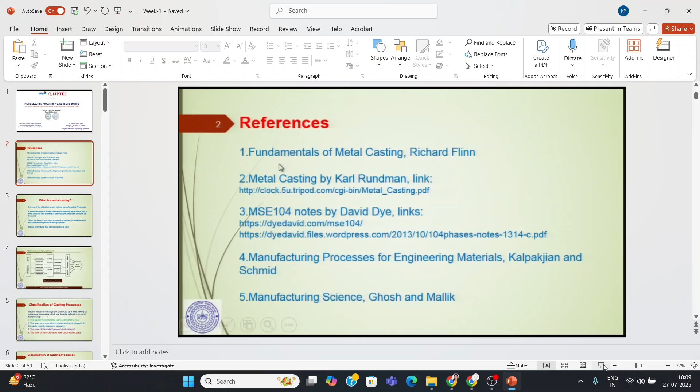Okay, someone is joining. Then I will solve some numericals. This will be very helpful for your basic understanding, and if you are attending the GATE exam or like this competitive exam, it will be helpful for you also.

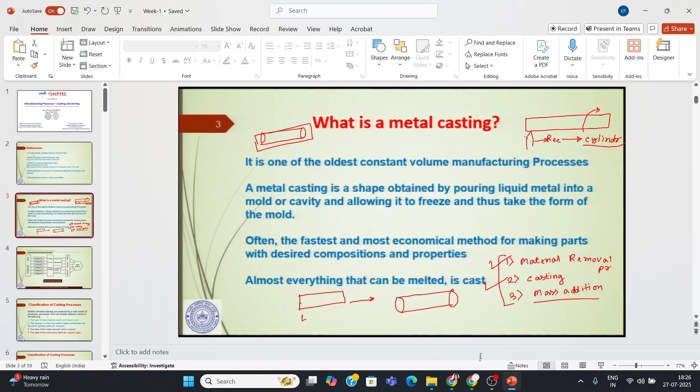Okay, this is also possible actually. How is this possible? But this is not very worthy actually. How is it possible? You can add some material through the corner side and try to give it a rectangular kind of shape by adding some material over the surface. But it is not so good a process, or it is not so convenient actually. But you can make it.

So there are three major principles on which the overall manufacturing process stands. First is material removal processes, second is casting, and third is mass addition processes. Here we will study the casting processes only.

You know the definitions of casting already, you have studied. A metal casting is a shape obtained by pouring liquid molten metal into a mold or cavity, and allowing it to freeze, thus taking the form of the mold. I think you have studied it. It is very simple.

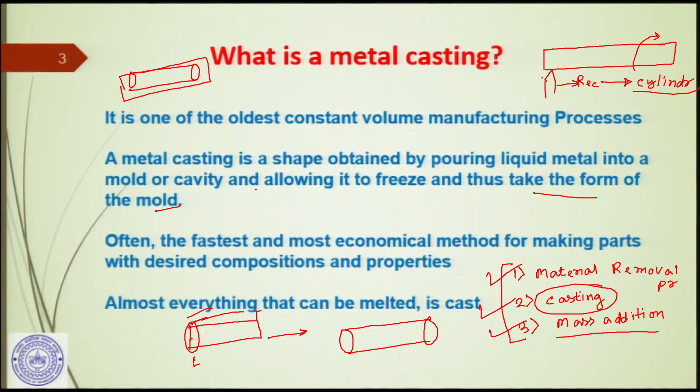This is also the basic thing: how a component, any component of an automobile or anything, how the final product can be prepared. First you have to take the raw material, then you have to go through the different processes.

You can prepare a component by casting directly, or you can go through primary forming, like different machining - lathe operations, cutting, grinding, different things. This is the secondary operation, also including machining, grinding, all the things. And finally you have to give some finish - surface finish, or maybe some joining process is there.

Suppose you are going to make a T section - you have to make two different parts, then join them together to make the final product, this T shape. This is the joining process, assembly process, or finishing process. After preparing the material, you have to give the surface finish, such that the material can be usable or user friendly, or you can easily use it. This is how you get the final product.

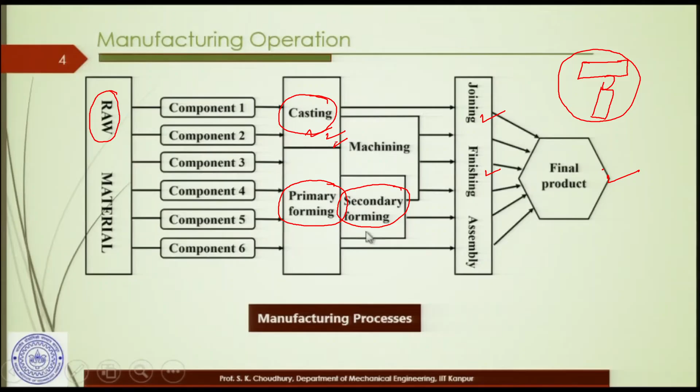But here we will only concentrate on the casting processes. These are very basic things you have already studied - the type of mold you can use, sand mold or permanent mold. These basic things I will not describe here.

Classifications of the casting processes: expandable casting includes expendable mold and permanent mold. Expendable mold means it is a single-time usable mold, like sand casting. You are giving a shape.

Suppose you have to prepare one cylindrical rod. Outside the cylindrical rod there will be sand, and inside you have to prepare a mold cavity like a cylindrical cavity. When you pour the molten metal, it will take the cylindrical shape, and finally you will get the rod-type cylindrical shape material. So this is sand - here sand is used for the casting. After getting the final material, you can break this sand, and you will prepare the next type - any material you can prepare.

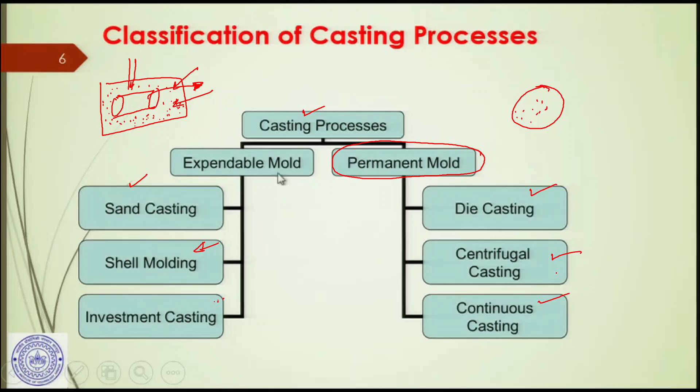Permanent molding includes die casting, centrifugal casting, and continuous casting. This is the permanent mold - here sand is not used. This is some data you can go through; I am not going through the details.

What is the main advantage of casting? The main advantage of casting is there is no loss of material. Suppose you are making one product by casting, you will pour the liquid molten metal into the mold cavity and give it one particular shape. Any extra material or extra part, you will just machine it off, and then again you can melt it for reuse, and again prepare another casting. There is no loss of material.

That's why it is called a constant mass operation process. But for the case of machining, the material will be lost in the form of chip. This is the main advantage.

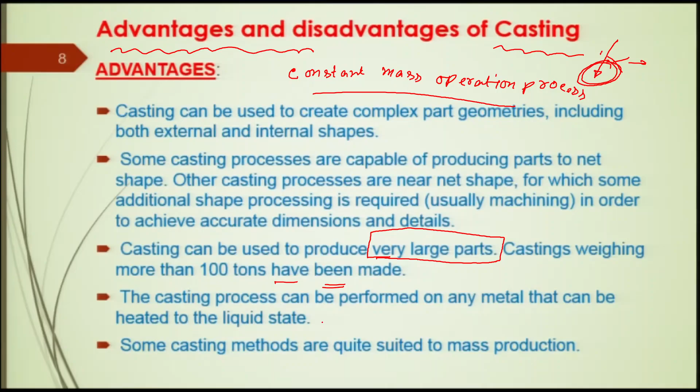What is the disadvantage of these casting processes? The mechanical properties, like porosity, strength may be damaged, or mechanical property may decrease due to porosity. Actually, how does the porosity come? Do you know, any one of you? How does porosity come into the final product? How does porosity occur during the casting process?

You don't know. This is a very simple thing. You should answer.

Due to shrinkage? No, no, no, due to shrinkage, no.

Yes, trapped gas, exactly, Sri Sri. Sri Sri has answered, but he is messaging. You can unmute and you can say, okay, yes.

Due to the trapped gas. How will the gas form? Any one of you can say? In the mold cavity, suppose this is the sand, I am preparing one cylindrical rod. How will the gas come?

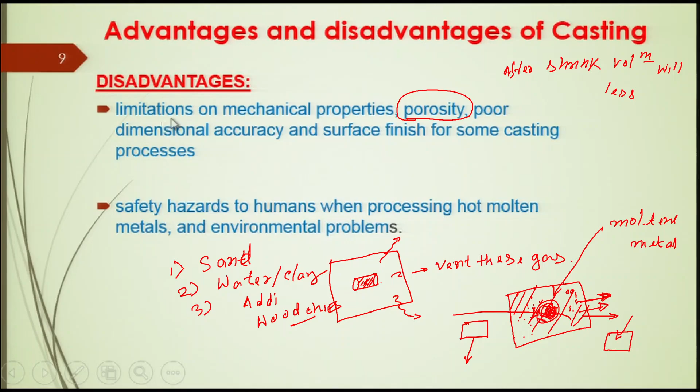Can you give one example of mass addition processes? Mass addition process, third manufacturing process, whatever I have discussed. What is an example of mass addition manufacturing processes? Casting? No.

Casting is a constant mass operation process. That means the mass of the final product and the initial product is the same in the casting process. But I am telling you something you are going to manufacture where the final mass will be higher than the initial mass.

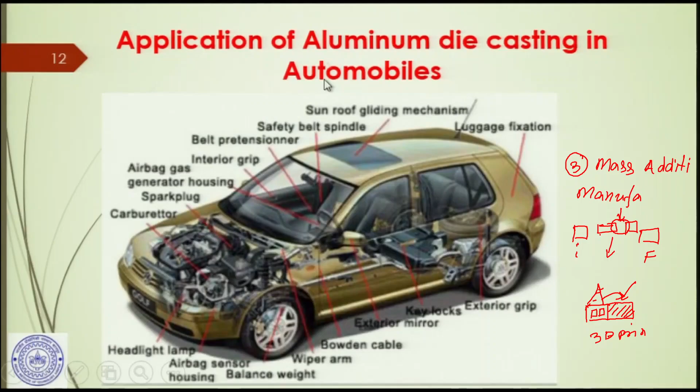So mass addition processes are basically welding and rapid prototyping processes. Continuous and constant mass operation process is the casting process, and material removal process is lathe machining, different machining processes, and surface finishing processes. On the basis of these three basic principles, manufacturing processes are classified. You should understand this - I think you have studied all this in the video, so I will not go over it again.

Pattern - what is a pattern? Is it required in the casting process? Yes, sir, yes.

How is it required? First of all, if you are going to manufacture any piece of material, you have to make one replica of your final product. Replica means you have to prepare the same thing using a different material like wood, or not costly material - easily available material.

Then you have to make the mold cavity inside using sand, green sand molding. Then you will get the desired shape inside the mold cavity, pour the liquid molten metal, and get the final product after solidification. So the pattern is the preliminary part you have to prepare.

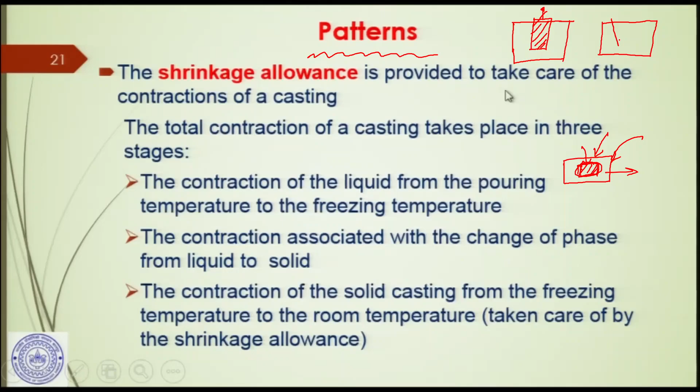And another pattern - I am making another pattern here. Suppose here is the another pattern. Which one will be easily removed without any damage to the mold cavity? This is the first one, and this is the second one.

Without damaging the surface of the mold cavity, which pattern will be suitable? First or second - which option is right? Second. Why?

Taper is provided as draft. Draft means some angle is given, such that the mold cavity will be less damaged. After that, as I have added extra material, like here, just a trapezoidal shape, this extra material will be removed by machining processes. This extra material is called the draft allowance. Is it clear?

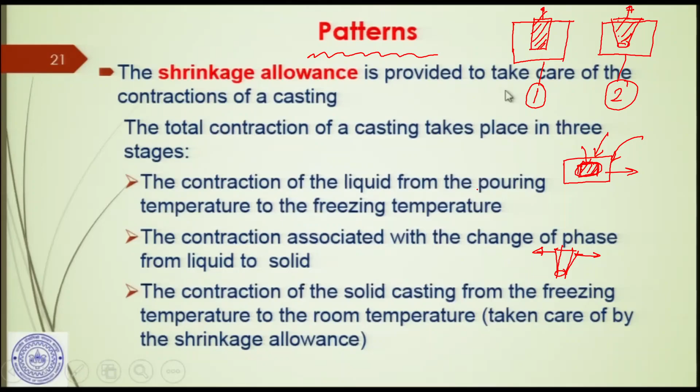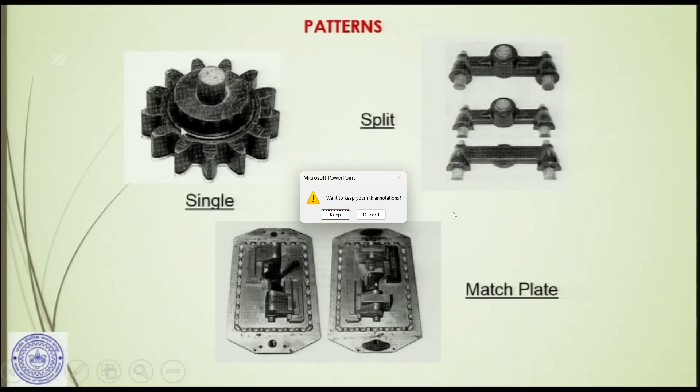Okay, this is the single piece pattern, split pattern, match plate pattern. You will study it yourself because it is very theoretical part. I will solve one numerical. This numerical will help you understand all the things. If you solve this numerical in your GATE examinations or any other examinations, your basic concept will be very clear.

The students are yet coming. It's 7. Okay, please try to join on time.

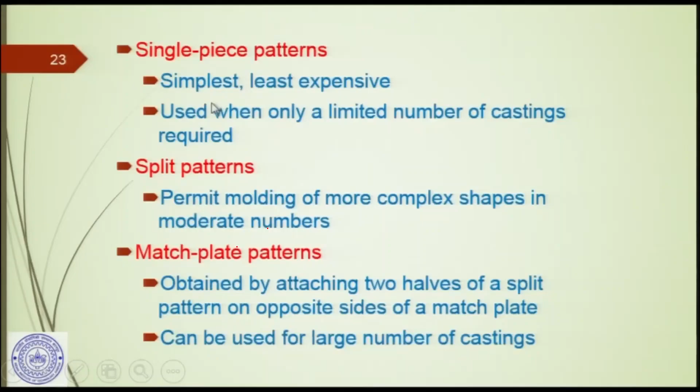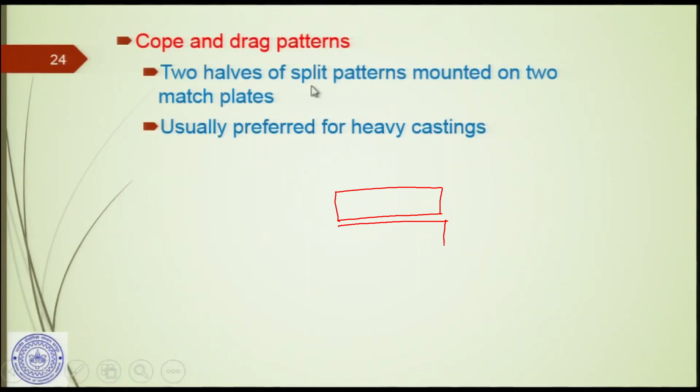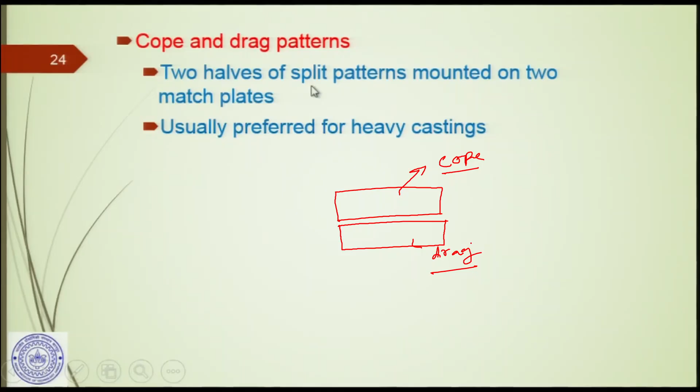This is the theoretical part, I am not going into details. What is the cope and drag? These are the upper and lower parts of the mold. What is the top part called, cope or drag? Upper part is the cope. Just remember these questions because in many examinations like SSC, JE, you can find this type of questions.

This is the shrinkage allowance. Why is the shrinkage allowance given? Because you have to make a slightly larger size cavity or larger size pattern. When the liquid molten metal fills the larger size cavity, after solidification you will observe that the volume is reduced, because of the shrinkage. After solidification the volume will be less, that's why you have to prepare slightly larger size, you have to make the pattern in a larger size. This is actually because of the coefficient of expansion of the material. Due to this shrinkage allowance you can calculate.

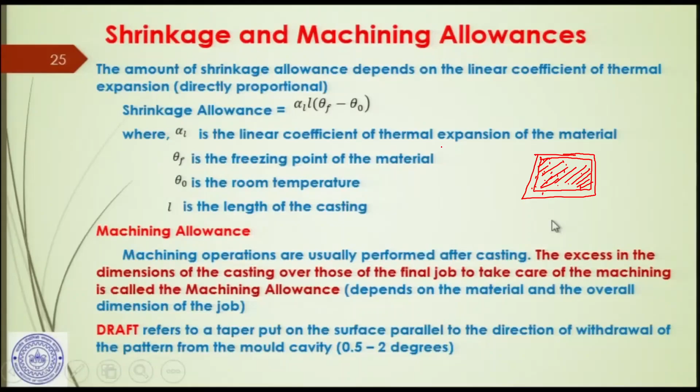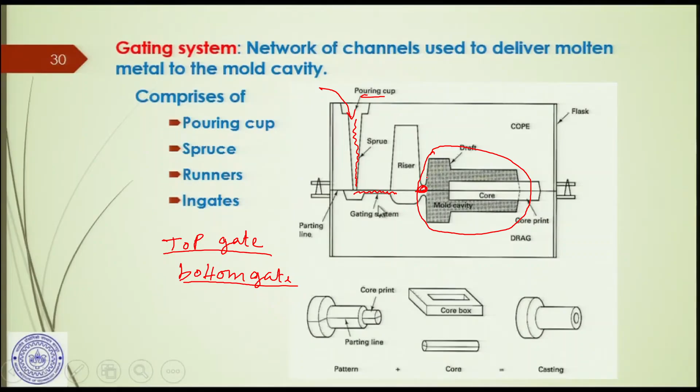You should say this is a combination of top gate and bottom gate. This is the gate, this is the gate, and this is the upper portion. When this upper portion is filled, that's called the top gate, and at first this bottom portion gets filled, that's called the bottom gate. So it is a combination of the top gate and bottom gate. Okay, we will study.

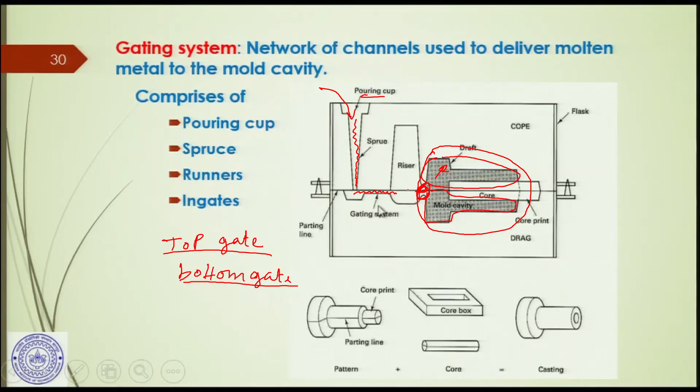Green sand molding: how are the combinations, preparations and compositions made? Sand is an important question - 70 to 85% sand is used, clay is 10 to 20%, and water is 3 to 6%. 3% is very optimum. Also additives like wood flour, dextrine, and sea coal. This is the combination.

One question came in the GATE, I forgot the year. What is the water percentage in green sand molding? You have to remember that it's 3 to 6% water content in green sand molding, and clay is 10 to 20%. Otherwise the sand will not bind properly.

Sir, if you increase the water percentage in the green sand molding, the mold will be weak because of the extra moisture. Exactly, the mold will be weak. Any other problem?

Just see the diagram: X-Y, tensile strength versus weight percentage moisture. Then only you can answer. If we increase the water after 3 percent, the mechanical strength reduces. It is very clear. And what is the other thing?

Permeability decreases. How? The extra water will occupy the porosity - yes, extra amount of water will fill in between the two sand grains. So then the permeability will be less.

And what about density? Density will increase - it's the same thing. The extra porous portions will be filled by the water and the density will be increased.

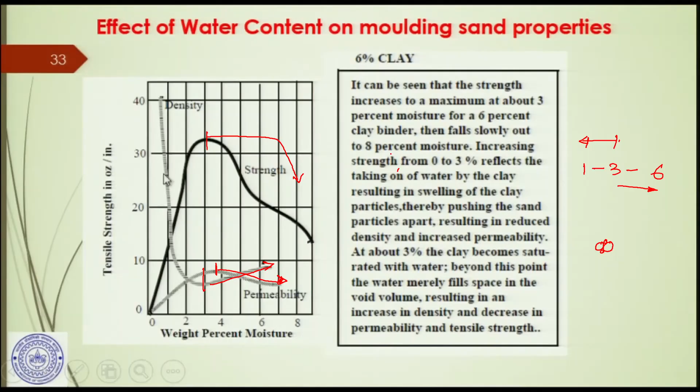And below 3 percent, from 0 to 1, 0 to 3, the density will decrease and the strength will increase gradually, and the permeability will also increase. These things you have to remember - how the percentage of water in green sand molding affects mechanical strength, permeability and density.

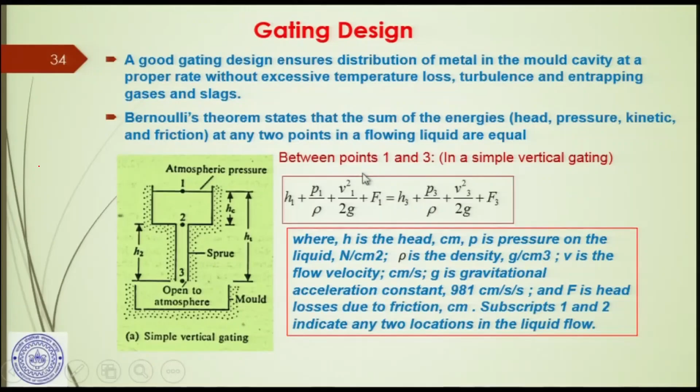Gating design is important. This is the bottom gating. There are two gating systems - bottom gating and top gating. This is the bottom gating, I am explaining here.

This is the molten material, and the molten material is coming through the sprue to the mold cavity. This is the mold cavity. Why is it open to atmosphere? As it is inside the mold cavity, why is this written as open to atmosphere?

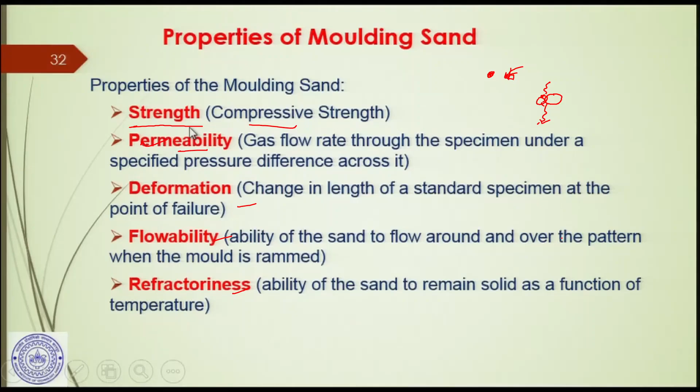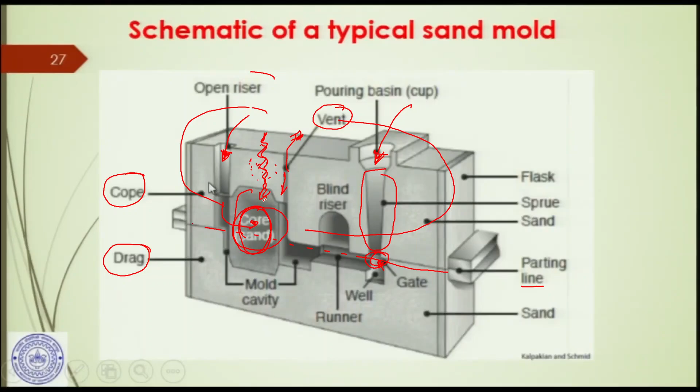Because the vent is provided and the porosity is provided inside the sand, there will be atmospheric pressure. The vent is provided and inside, in between the two sand particles, there will be a gap. The pressure will feel like atmospheric conditions.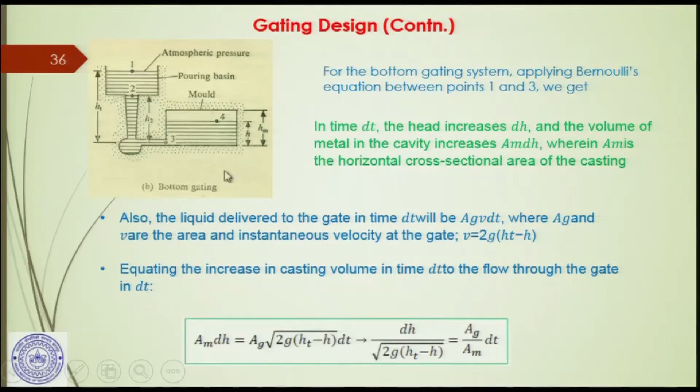I am going to explain the top gating system and bottom gating system. This is important, I am taking some new slide.

This gate design is important. Suppose this is your pouring basin, and the pouring basin is extended by the sprue. This is the sprue, and the molten material is fed here.

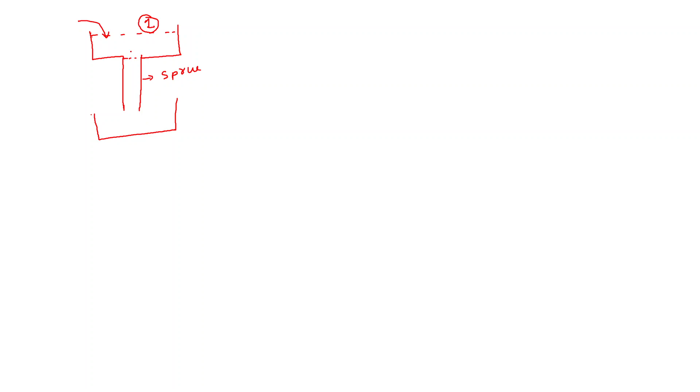The top surface is called 1, and here the sprue section is 2, and the opening at the gating system is 3, and this is the mold cavity. Here this is the mold cavity, this is the mold cavity, this is the mold cavity.

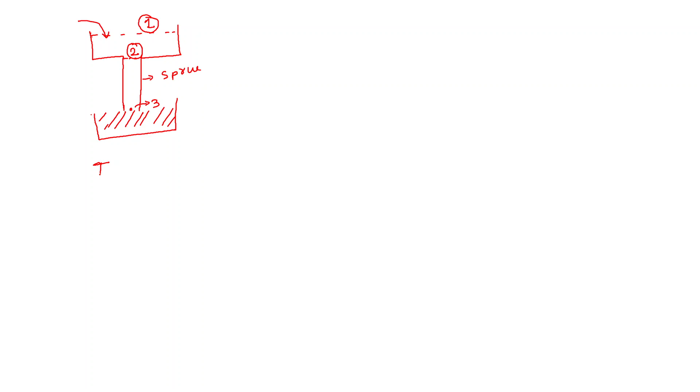Is it top gating or bottom gating? This is top gating. This is the top gating system because the molten material is fed on the top side of the mold, top side on the mold cavity. Is it clear?

Yes sir, okay. What is the important thing? What is the time to fill the mold cavity? This question is important, you have to calculate it. Why will we calculate the time for filling this cavity? Anyone of you can say why we are calculating the time?

I think you have studied the lecture of Professor Sounak Kumar Choudhury, and any lecture you have studied in BTech mechanical engineering. We are going to calculate the time of filling. This is very crucial, very important during the gate design. What is the reason we are interested in time? Anyone of you can say?

So, due to the process of solidification, sir? Yes, because time is very important. If it will solidify before - suppose we are pouring the molten material and it immediately solidifies, and it is not reaching the mold cavity. Before reaching the mold cavity it gets solidified, or sometimes the molten material does not fill the whole mold cavity. That's why time is very important - we have to calculate the time to fill up the whole mold cavity.

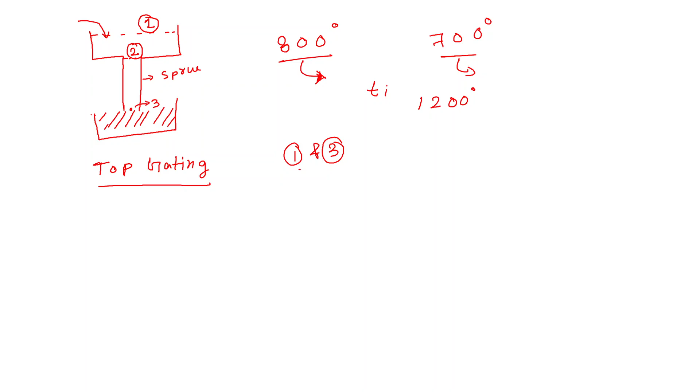If I apply Bernoulli's equation at points 1 and 3, what is Bernoulli's equation for points 1 and 3? This will be P1 (pressure 1) divided by rho g, plus V1 square divided by 2g, plus - I have to give the head. This is the head, this is the total head, HT is the total head. And H2 is this head, and this head is HC. I am applying Bernoulli's equation at points 1 and 3.

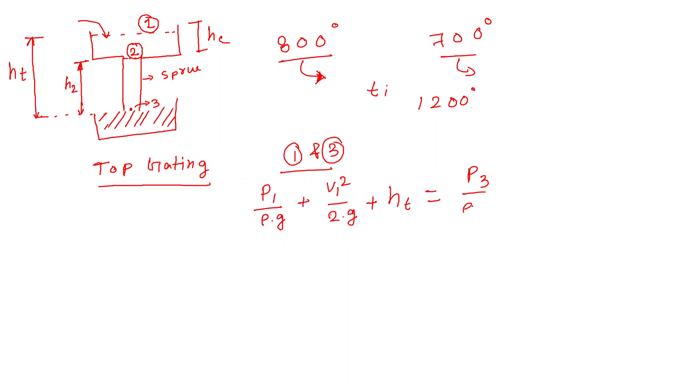At point 1, the total head will be HT, equals to, for point 3, pressure at 3 divided by rho g plus V3 square - you have studied these equations now - plus it will be 0. Why am I writing 0 here? Because I have taken the baseline datum line from here. H3 is the 0 head, that's why it is 0. Is it clear?

This P1 by rho g and P3 by rho g is the same. This is atmospheric pressure, atmospheric condition. Why is this atmospheric condition? One is during the pouring of molten metal, it is atmospheric conditions. But inside the mold cavity, at the gate portion, this is also atmospheric condition. So P1 and P3 are the same, atmospheric conditions, so we can cancel them out.

Now the V1 velocity - what is the value of V1? Velocity of the molten material at section 1. Is it zero, sir? Yes, 0, because we have just started pouring the molten material, so molten material velocity is zero. After that, due to gravity, the molten material starts taking velocity.

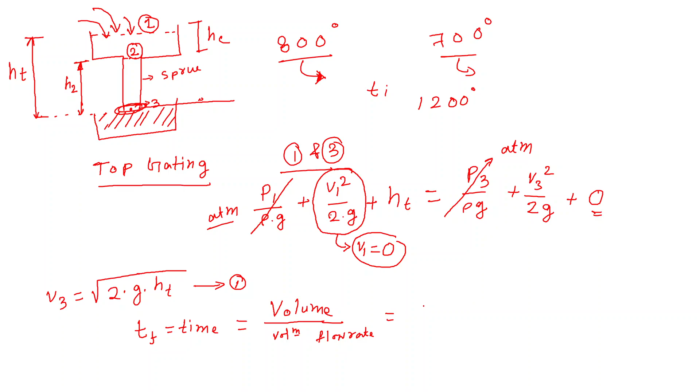So our main objective is to find out the time. This is equation 1. How will I find out the time? Time is the total time to fill the mold cavity - this is total volume of the mold cavity divided by volume flow rate of the liquid. So total time is V, the volume of the mold cavity, divided by AG into V3.

V3 is the velocity, and capital V is the volume of the mold cavity. AG is the gate area - if it is cylindrical, then the area will be pi by 4 d square, gate area at section 3. And V3, the velocity of the molten material, we already know from equation 1, is under root 2G HT.

Is it clear? Material flow at section 3. So we can easily calculate the time if you know the volume of the mold cavity, capital V, and if you know the gate area pi by 4 d square, and the velocity calculated from Bernoulli's equation using sections 1 and 3. You can easily calculate the total time to fill the mold cavity for the case of the top gating system.

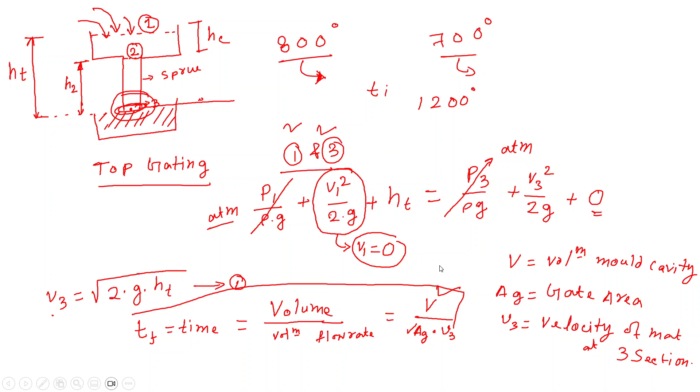Is it okay? Yes sir. Okay, next is the bottom gating. Bottom gating is a bit different, you have to understand. Let me try - how the bottom gating is, this is bottom gating. It is not actually a proper diagram, but this is the bottom gating, I will make you understand.

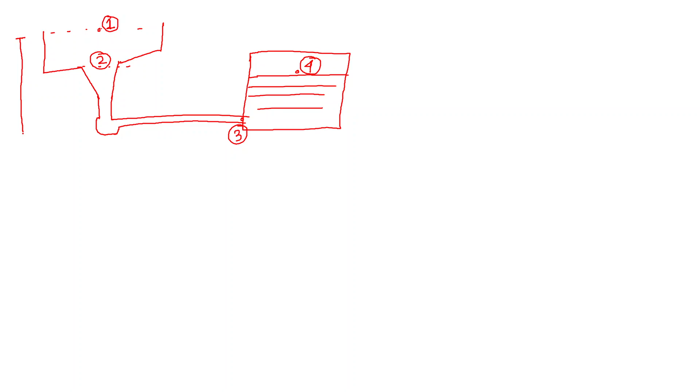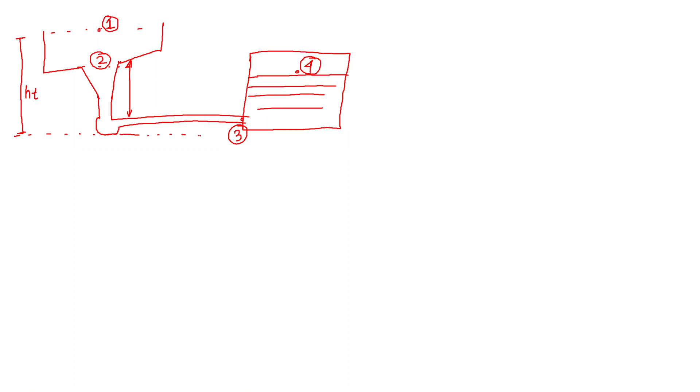The top surface is called position one, and this is position two, and the gate system is position three. Your molten material is filling up to this point - suppose this upper portion is 4, section 4. The total height from 1 to 3 is HT. And H2 is the height from 3 to 2. This is the datum line 3.

At any instant, the height of the molten material filling the mold cavity is H, and the total cavity height is HM, the mold height. At any instant this is H - H is the variable and HM is the constant.

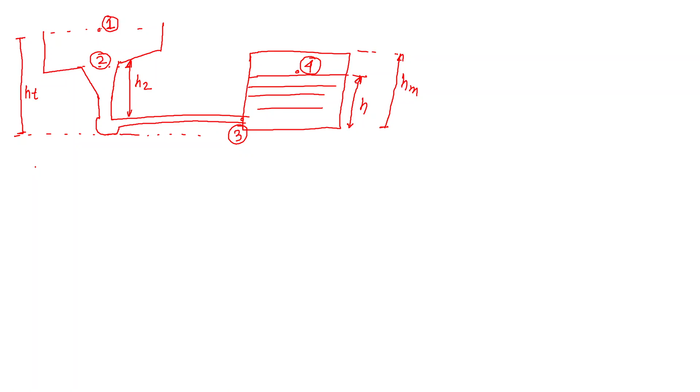For that case, you have to apply Bernoulli's equation at points 1 and 3. What will happen for points 1 and 3? This is P1 divided by rho g plus velocity, which will be 0, plus the height HT. If you don't understand, just ping me. At the three portion, P3 divided by rho g plus V3 squared divided by 2G plus 0. Now you can calculate the value of P3.

Next, apply Bernoulli's equations at the points 3 and 4. This is p3 divided by rho into g, plus v3 square divided by 2g, plus height, equals to position 4: p4 divided by rho into g, plus v4 square divided by 2g, plus h.

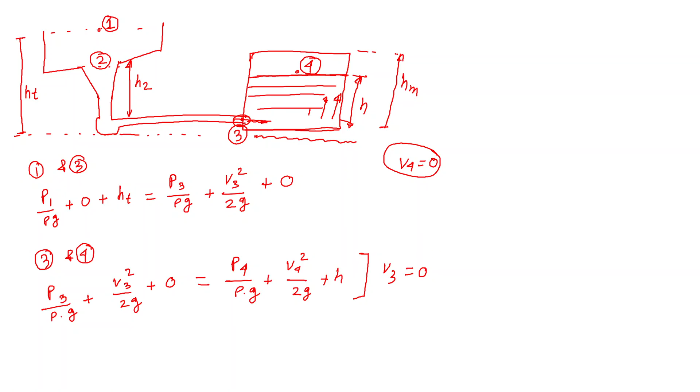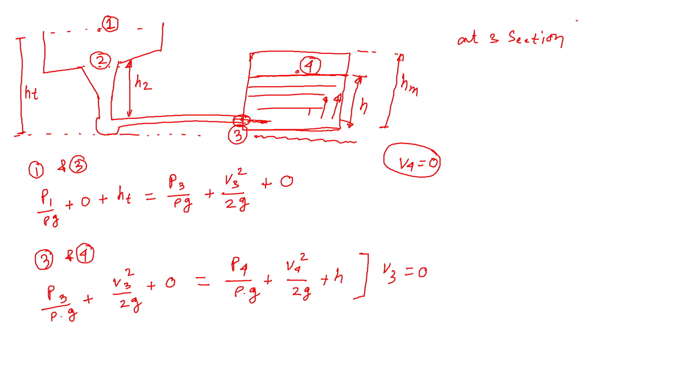That's why V4 is taken as 0, and V3 is also taken as 0, because just at the opening position, the kinetic energy loss is complete. At three sections, kinetic energy loss completely. V3 and V4 values are taken as 0.

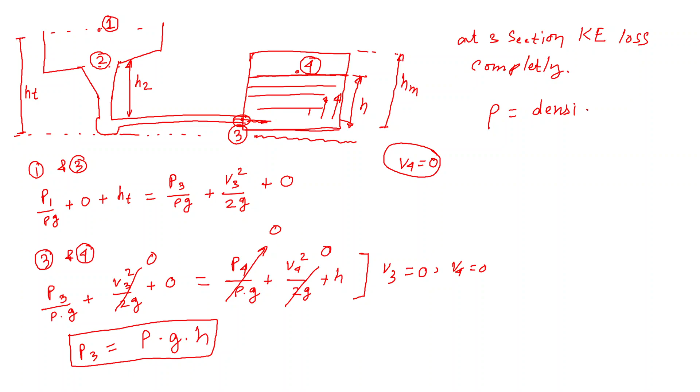So this is also 0, and this is also 0, and P4 is the atmospheric pressure. As P4 is atmospheric pressure, under atmospheric conditions, we take it as 0. So P3 will be rho into G into H. What is rho? Rho is the density of the molten metal.

So you have one equation - this one - and you have this other equation, two equations. If you put this equation two into equation one, you will get the result. You will calculate it at home, otherwise you cannot understand. I will send this slide via a link, and you will get the updated link. If you put equation 2 into equation 1, you will get the result.

You will get v3 value equals under root of 2g into ht minus h. This is important.

Next, our main motto is calculating the time. How will we calculate the time? AM is the cross sectional area of the mold.

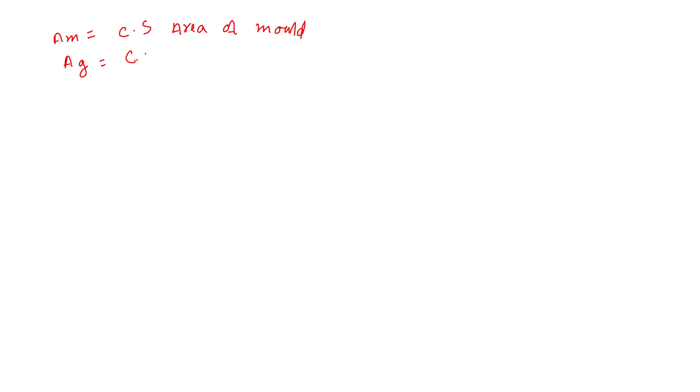And AG, you know, is the gate area, the cross section area of the gate. So if we apply the continuity equations to the gate and the cross section area of the mold, this will come out that AM into DH - DH is the height at any time. In the previous slide, DH is at a small instantaneous time, suppose this very small instantaneous time DH at a time t.

I am calculating for a small portion, the DH portion. Cross section area multiply by DH - this is the total volume. This is a very simple thing. You just take DH, a very small portion, multiply by cross section area, and it gives the total volume at a very instantaneous time.

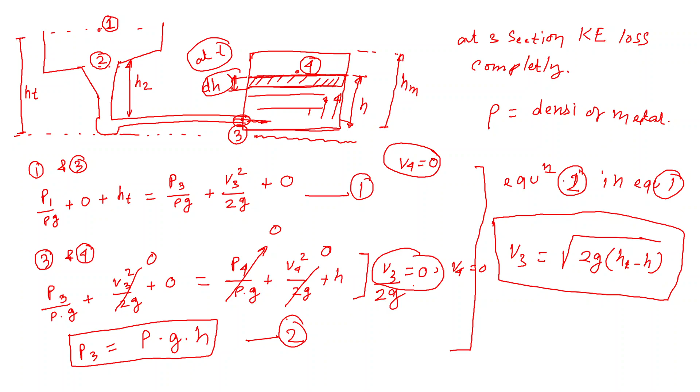So if we put VG - in the previous slide, VG means V3. If we put V3, V3 means VG. One thing I mistook here: the kinetic loss is complete, that means V3 is not zero. V3 is not zero, it is actually head - V3 squared by 2G equals to 0. This is V3 head, called kinetic head. V3 squared by 2G equals to 0. V3 is VG.

Velocity is not 0, but kinetic head is 0. Are you getting me? Just try to understand. It is a bit difficult. Not difficult, it is very easy if you think this way.

If you put the value of VG or V3, it will come out that AM into DH equal to AG under root, 2G into HT minus H, into dt.

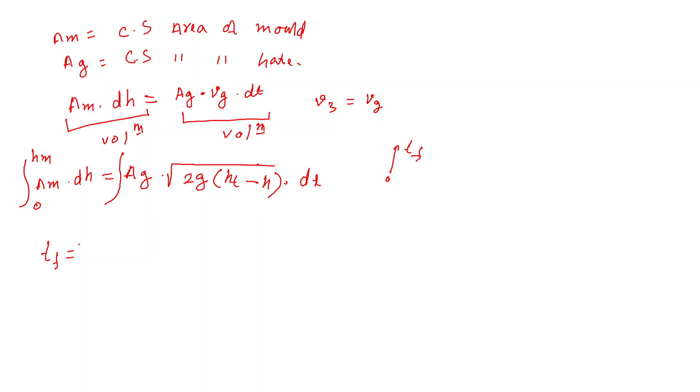If you integrate the whole thing, from 0 to HM, total mold height, and 0 to time TF, final time, if you calculate TF, how much time is required to fill the total mold cavity, it will come out as mold area divided by gate area, into 1 by root 2G. This equation is important for your numerical solving.

Into 2 bracket, under root, HT minus HM. This is the total time required for bottom gating.

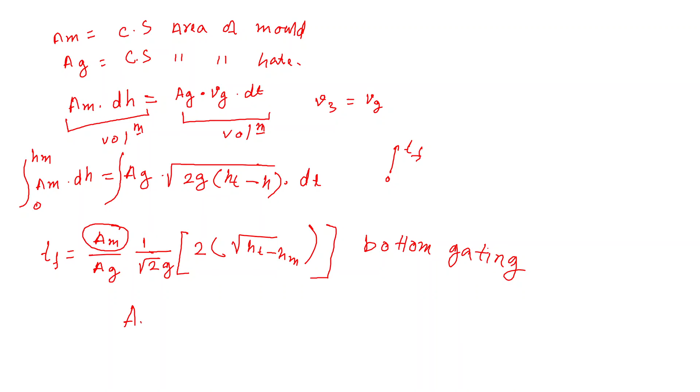If you know the total surface area, AM is the cross sectional area of the mold, AG is the gate area, G is the gravitational acceleration, HT is the total height, and HM is the mold height.

Now you can solve the MCQ numerical questions. Are you getting me? Any confusion?

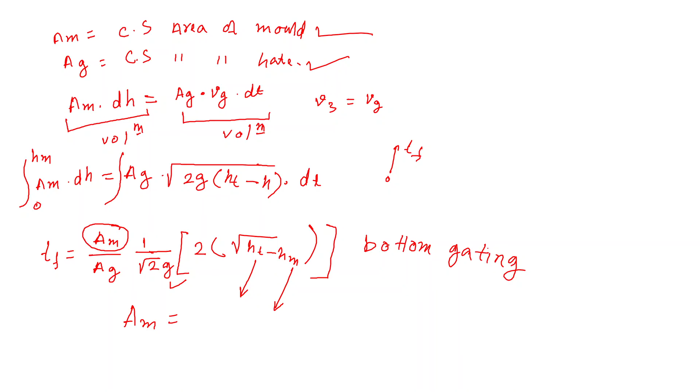I am coming to some basic questions. First question: casting process is considered as what? Options are preliminary shape forming process, secondary shape forming process, constant volume manufacturing process, mass addition manufacturing process. The answer is constant volume manufacturing process.

Why constant volume? Because in the casting process, initial mass equals final mass. There is no loss of mass of the material. That's why it is the constant volume process.

Patterns are made somewhat larger than the final casting to produce. This excess in dimension is referred to as what? Options: tolerance, machining allowance, limits, shrinkage allowance. Machining allowance is the answer.

Next, shrinkage allowance - you also have to give shrinkage allowance along with machining allowance. What are the allowances you have to give? Machining allowance, shrinkage allowance, and draft allowance - at least three allowances you have to give. Here the options are machining allowance and shrinkage allowance, both B and D, so option 3 is the right option.

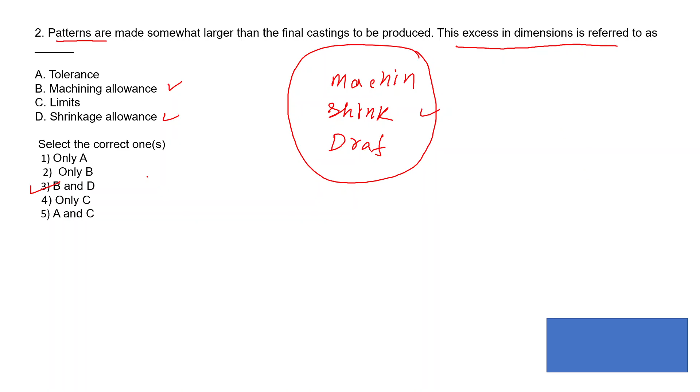Question number 3: strength and permeability of the sand used in sand casting process are mostly influenced by clay content, hardness, grain size, moisture content, or type of sand.

The answer is moisture content, because strength and permeability come from the moisture content. If the moisture, meaning water percentage, is high, the strength will decrease and the permeability of gas will decrease. So option number 3 is the right option.

In order to facilitate withdrawal of the pattern from the sand mold: pattern is polished to make it smooth, allowances are given and pattern surface is lubricated, or draft is provided on the pattern. Draft is provided on the pattern - yes, that's correct. I have shown you the diagram that it is in taper form.

After that, the extra material in the taper portions will be removed to get the proper shape and size. Casting process is preferred for parts having many details, a few details, simple configurations with no details, or non-symmetrical shape. The answer is many details.

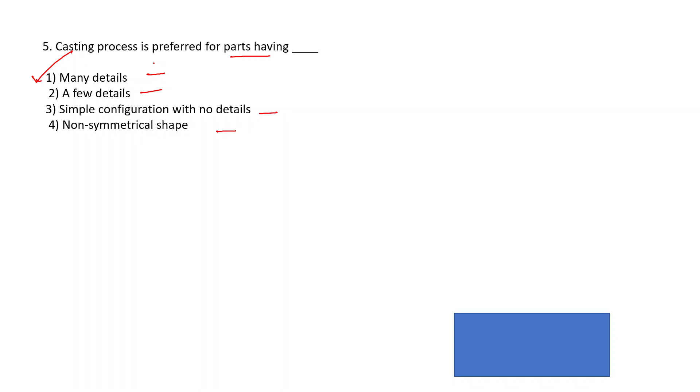Question number 6: the draft allowance on the wooden pattern, in comparison to the metallic pattern, will be same, more, less, or depend on the size of the pattern. Depend on the size of the pattern - now read the questions carefully.

The draft allowance on the wooden pattern in comparison to the metallic pattern - for wood and metal patterns in sand, in which case is the draft more? More on the wood side. Yes, more on the wood, because why?

Because it is affected by the moisture content - uh, that is not the right answer, because it's surface finish. Yes, wood has a higher frictional property. Wood and sand have higher friction compared to metal. Metal and sand have less friction. But wood has a higher friction. When you remove the wood...

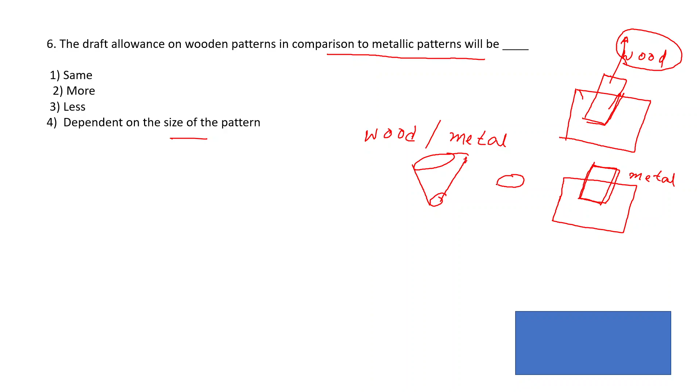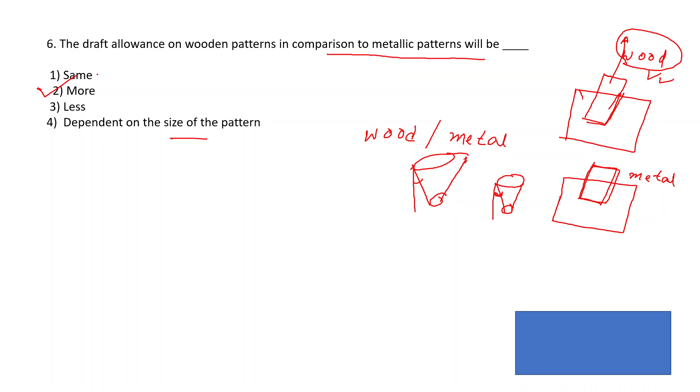Draft allowance means you have to make the pattern at an angle. For wood you have to make a higher angle, but for the same material in metal you can give a less angle. This is the draft angle - how much angle you are giving. For metal, the less angle is okay because wood has a higher frictional surface, that's why the answer is more. Higher angle means higher draft allowance. Now I'm coming to the next question.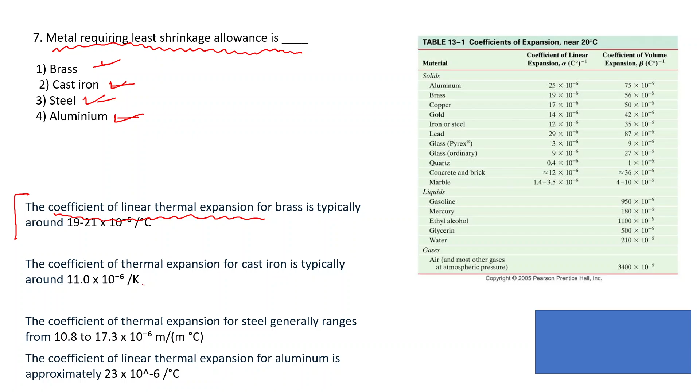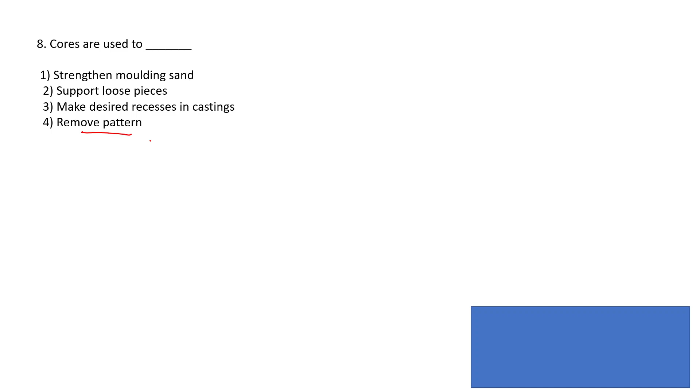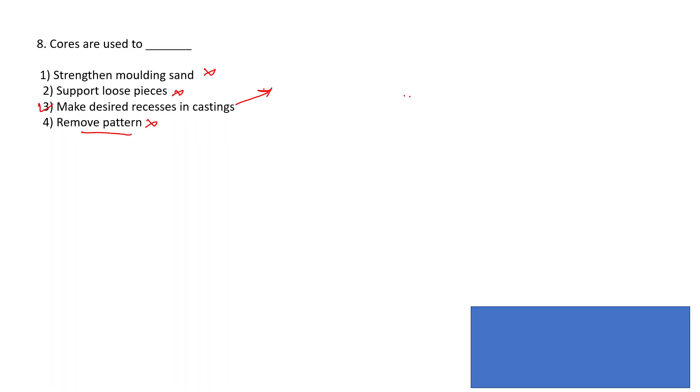Core are used to strengthen the mold, support the loose piece pattern, make desired recesses in the casting, or removal of pattern? It's not strength of the mold sand, and it's not removal of the pattern. It's to make desired recesses in the casting - meaning desired different internal parts or surfaces. According to our desired dimensions, for different parts we have to apply different cores. Suppose you are designing a hollow shaft - for making these kinds of things you have to give the core. For our desired different recesses in castings we have to use the core. So the answer is option 3.

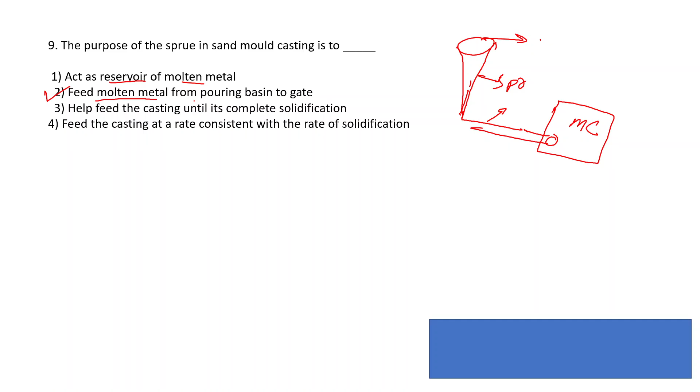The purpose of the sprue in sand mold casting is to act as a reservoir of molten metal, or to feed molten metal from the pouring basin to the gate. Which one is correct? I think it's to feed molten metal from pouring basin to gate, because the pouring basin feeds through the sprue, then through the parting line, then through the gate, into the mold cavity. So our right option is option 2.

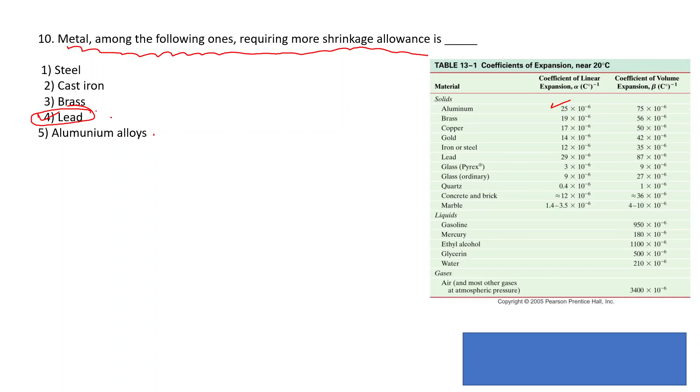Which metal among the following requires more shrinkage allowance? More shrinkage allowance means more thermal expansion coefficient. Aluminum has 25, lead has a different value. According to the tabulation, given the options, lead is the correct answer. Just check the values of all the options, and you'll see lead is correct.

The main advantage of shell molding is: metallic pattern is used, mold are stronger, thin section can be easily obtained, or high production rate is possible? Which one is correct? The answer is C - thin section. This question is important, sometimes it comes in JE, junior engineer exams. When a thin section needs to be prepared, you have to use shell molding.

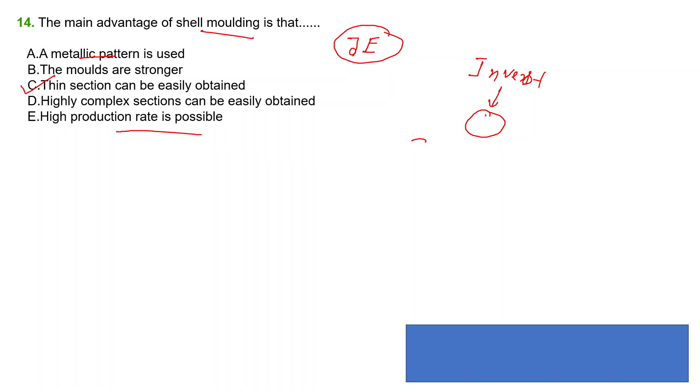Is investment molding done for higher precision or high rate of production? No. Investment casting is used where high precision is needed, like for gold casting. This is an important question - investment casting is used for these kinds of precision things.

Okay, I'm coming to one numerical, a very interesting numerical. Determine the time required to fill the entire mold cavity along with the riser.

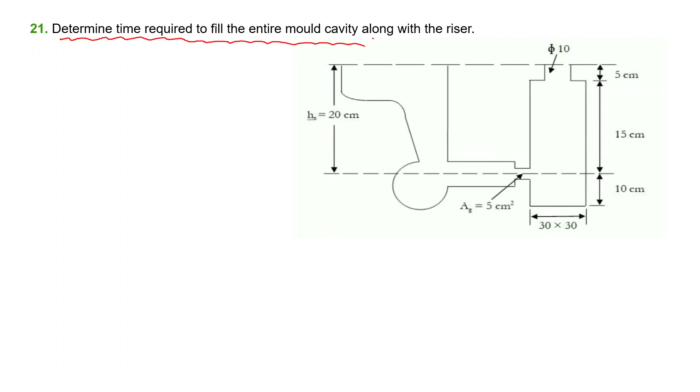What is this? This is the pouring basin. What is this dotted line here? Parting line.

Suppose here this section I am making it - this section is A section. When the A section is prepared, what is the type of gating system we will use here?

Top gating. It is called top gating, meaning that the material is flowing from the top side. A is the top gating, top gate. Is it clear?

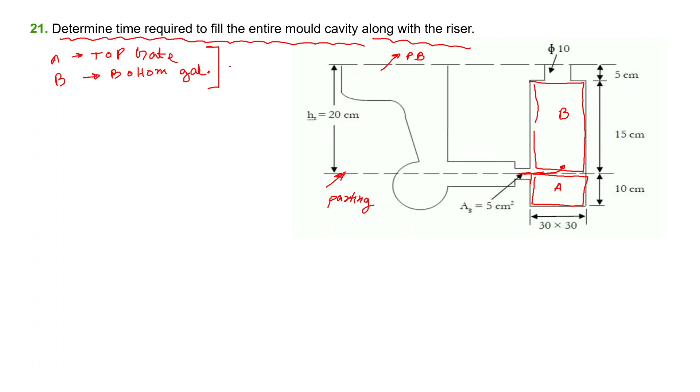Bottom gate. A and B total is the material, our desired material shape. And C is the upper portion, this cylindrical section C - could you say what is C?

What is the portion C here in the question? Along with the riser, C is the riser. So yes, you have to solve total A, B, C to fill the entire A B C area.

The total time you have to calculate. So the time to fill the A section, we know the formula here.

What is the formula for section A? The formula is simple - that is the time T for the portion A, it is a top gate.

Top gate formula: total volume of the mold divided by gate area, surface area of the gate, multiplied by under root of 2 G HT.

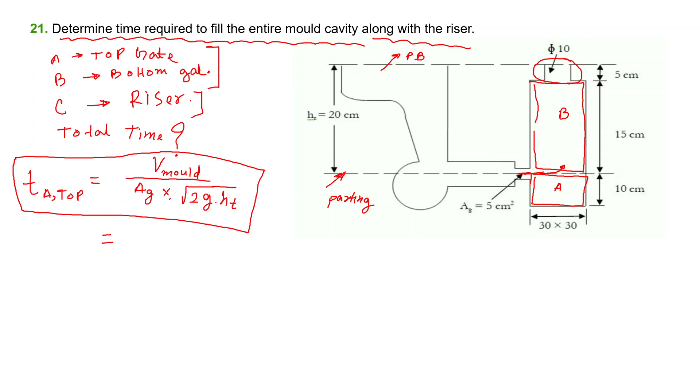This formula you already derived, na? You know this formula, you derived it. Yes sir. Total mold volume - what is the total mold volume? Volume for the A section.

For this section, what is the area? What is the volume? Area, cross section area 30 into 30, and height is 10. Total volume is 30 into 30 into 10.

Is it okay? Mold means this A area. Is it okay? Yes sir, okay. So then AG, what is the value of AG?

Gate area AG is given here - AG is 5 centimeter square. So this is: 5 multiplied by under root 2 multiplied by, it is in centimeter CGS unit, so 980 or 981 multiplied by total height.

What is the total height? HT, total height. 30... no, total height is 20, na.

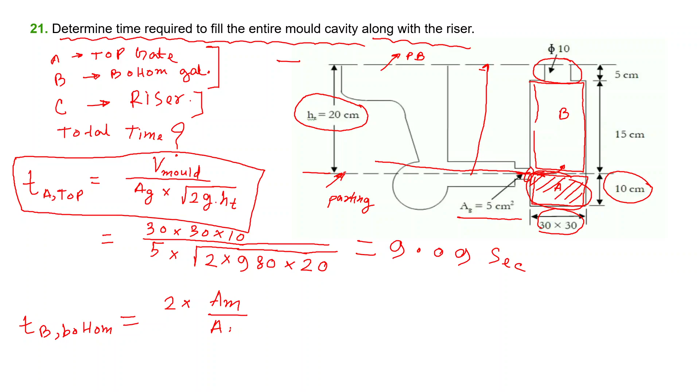This is the simple formula you should remember, already I have derived: 2 multiplied by mold area divided by AM by AG, already I derived, under root 2G.

I think you have forgotten all the things. Under root HT minus under root HT minus HM. Okay, if you put all the values, what is the AM here?

AM is 30 cross 30. AM here is 30 cross 30. I am writing in a different color actually.

30 cross 30 here, and what is the AG? AG is 5, and G value is 981, and AM is 30 cross 30. This is the 30 cross 30, and HT is the total. HT is 20 here, and HM is the mold height.

What is the mold height? From the parting line, from the gate to mold height - this is the total gate to mold height. For B, this is 15. So if you calculate this, the time will come to 18.17 seconds.

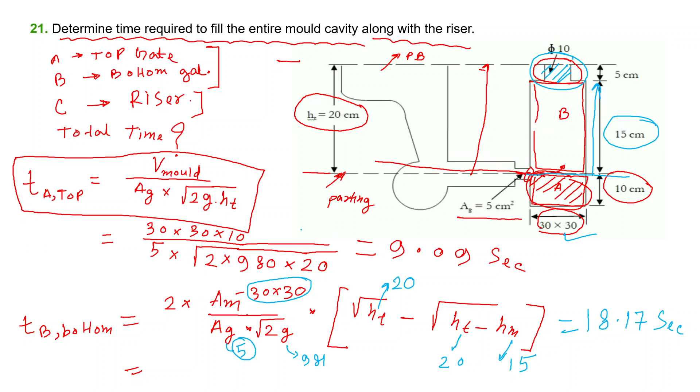Similarly, you have to calculate in the home what is the required time to fill the riser portion, this section, and answer the questions in the next class. Then you have to add the total time. Total time equals time required to fill portion A, plus time required for portion B, plus time required for portion C. Already you have calculated 9.09 seconds, plus 18.17 seconds, plus you have to calculate these sections and answer.

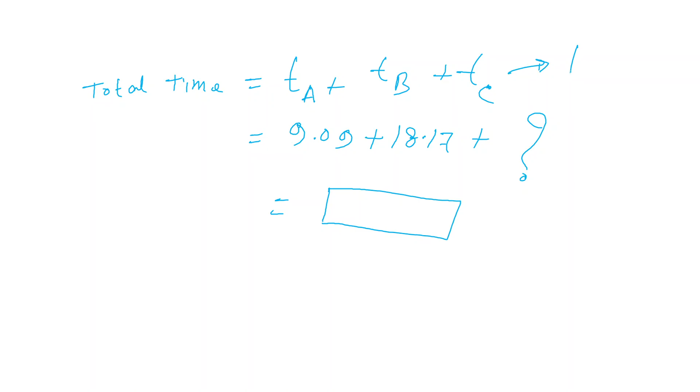I am giving you the answer. The answer is - TC is 1.58 seconds. Total time will require 28.84 seconds.

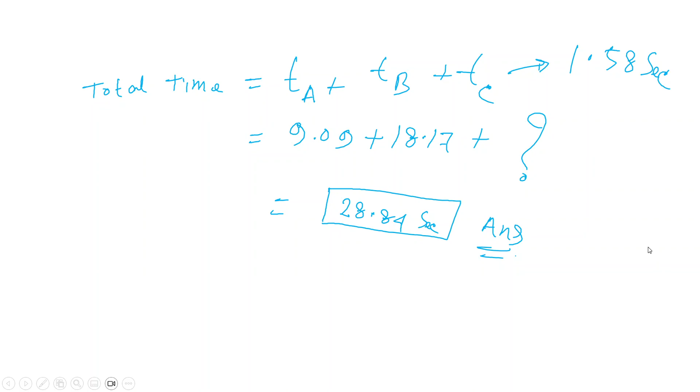This is all about today's class for the first week. Next week we will solve some numerical questions as well as some MCQ questions. If you have any doubts, you can ask me. I will try my best, and I will send all the slides, whatever I have written, and I have solved the numerical questions.